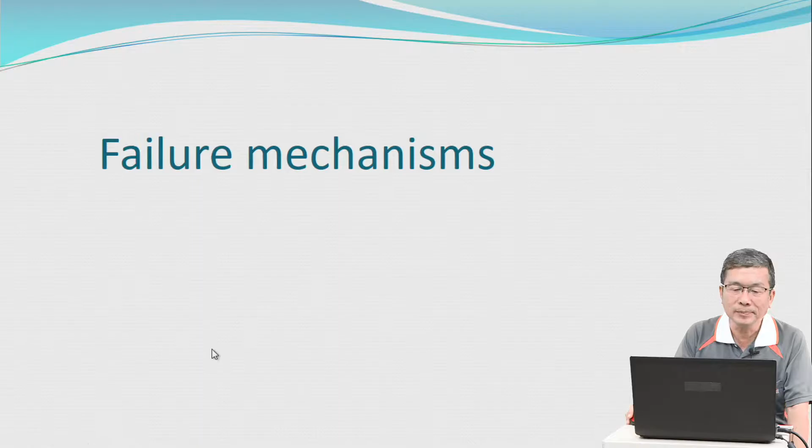Failure mechanism, the key words: failure mechanism takes into account the tensile, compressive, and shear stresses. Perform the calculations and tests. Ensure reliability. Rely on analysis, experiments, experience, and a design code. A simple model to prevent the material in a piece of hardware from being loaded to or above its yield stress.

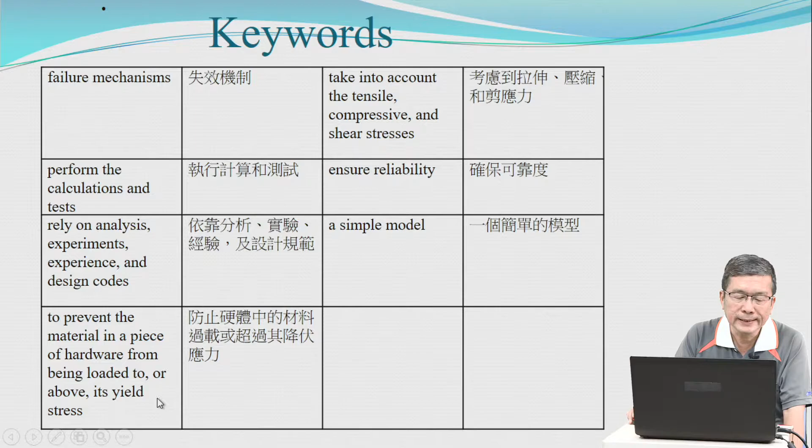Mechanical engineers determine the shape and the dimension and select materials for a wide range of products and types of hardware. The analysis that supports those design decisions takes into account the tensile, compressive, and shear stresses that are present, the material properties, and other factors that you will encounter later in your study of mechanical engineering.

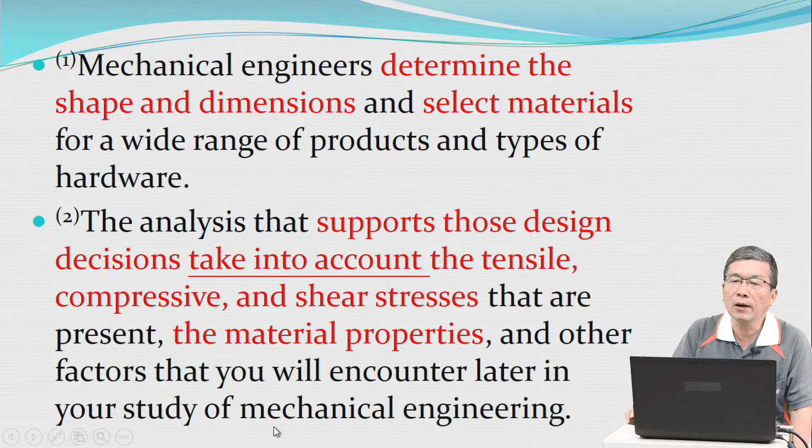Designers are aware that a mechanical component can break or otherwise be rendered useless by a variety of causes. For instance, it could yield and be permanently deformed, fracture suddenly into many pieces because the material is brittle, or become damaged through corrosion.

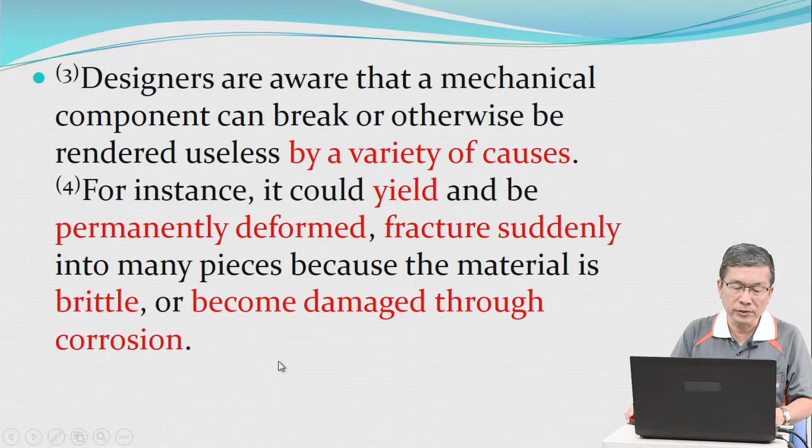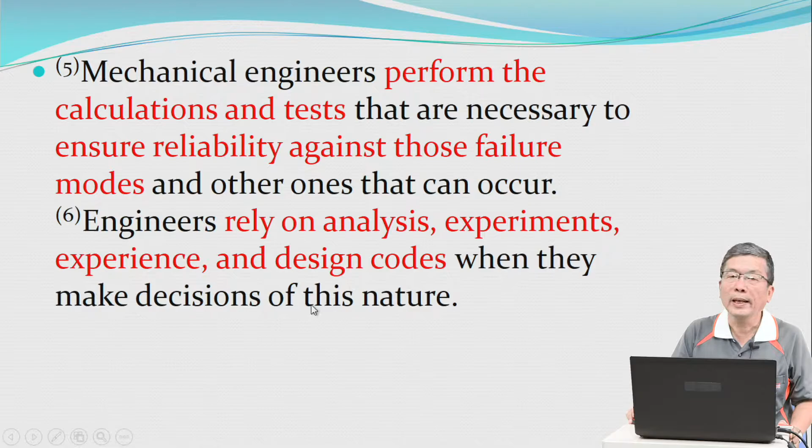Mechanical engineers perform the calculations and the tests that are necessary to ensure reliability against those failure modes and other ones that can occur. Engineers rely on analysis, experiments, experience, and a design code when they make decisions of this nature.

In this section, we introduce a simple model that engineers use to determine whether a mechanical component is expected to yield because of either tension or shear stresses. This analysis predicts the onset of yielding in ductile materials, and it is a useful tool that enables mechanical engineers to prevent the material in a piece of hardware from being loaded to or above its yield stress.

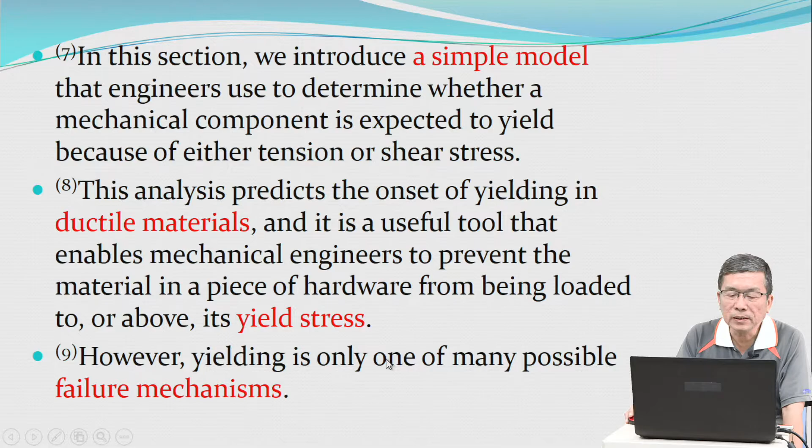However, yielding is only one of many possible failure mechanisms.

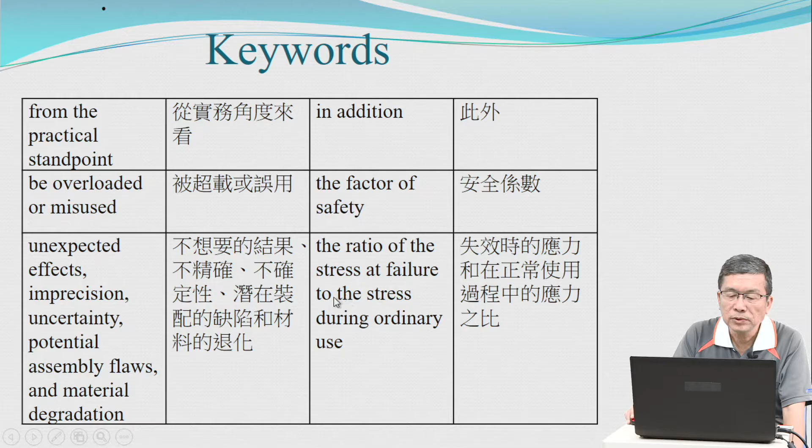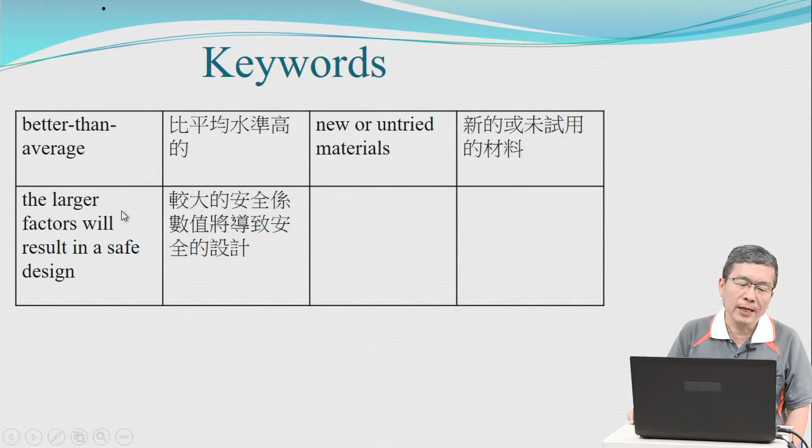Factor of safety, the key words: from the practical standpoint, in addition, be overloaded or misused, the factor of safety, unexpected effects, imprecision, uncertainty, potential assembly flaws, and material degradation. The ratio of stress at failure to the stress during ordinary use. Better than average. New or untried materials. The larger factor will result in a safe design.

From the practical standpoint, engineers recognize that despite their best intentions, nothing can be built to perfection. In addition, no matter how carefully one might try to estimate the forces that are going to act on a structure or machine, it is always possible that the mechanical component might accidentally be overloaded or misused.

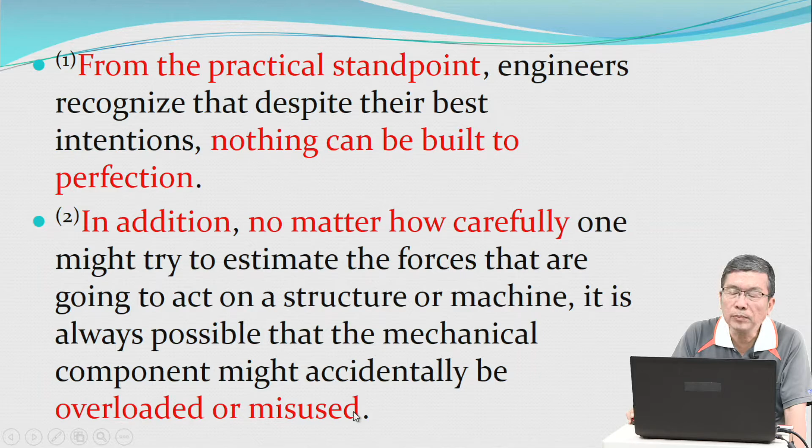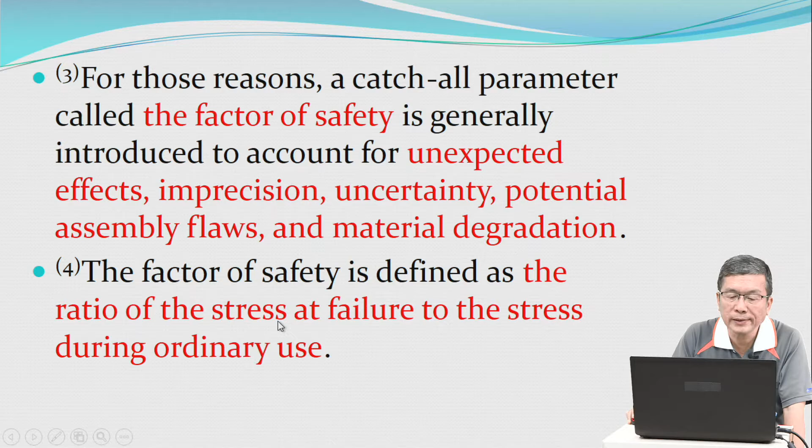For those reasons, a catch-all parameter called the factor of safety is generally introduced to account for unexpected effects, imprecision, uncertainty, potential assembly flaws, and material degradation. The factor of safety is defined as the ratio of the stress at failure to the stress during ordinary use.

The factor of safety to guard against ductile yielding is often chosen to fall in the range between 1.5 and 4.0, meaning that the design is intended to be between 150% and 400% as strong as it needs to be for ordinary use.

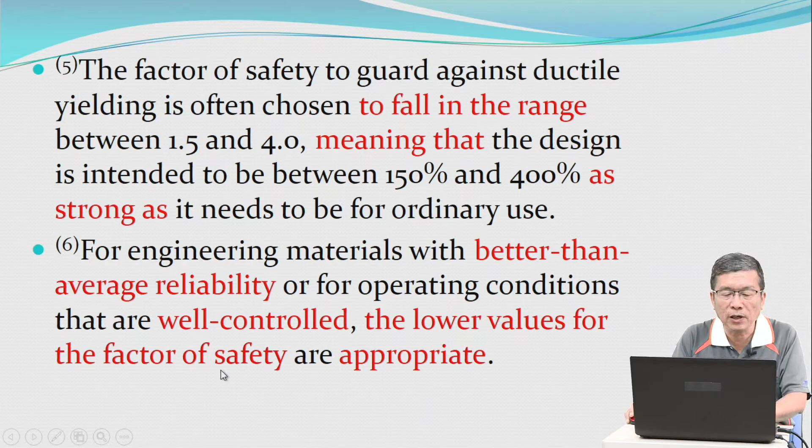For engineering materials with better than average reliability, or for operating conditions that are well controlled, the lower value for the factor of safety is appropriate. When new or untried materials will be used or other uncertainties are present, the larger factor will result in a safe design.

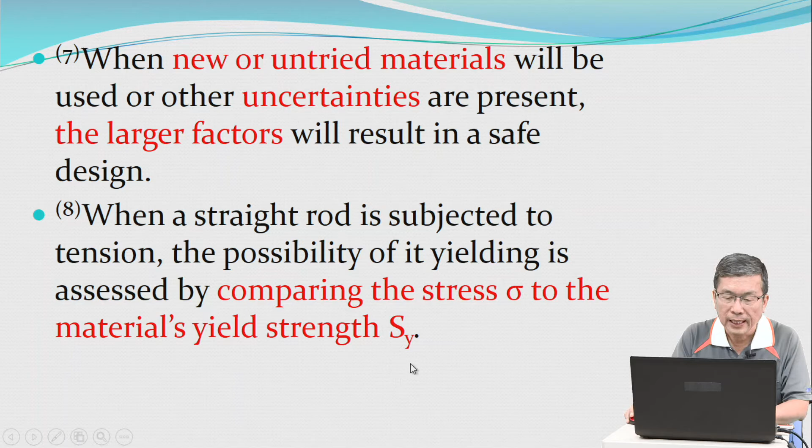When a straight rod is subject to tension, the possibility of it yielding is assessed by comparing the stress sigma to the material's yield strength S sub y. Failure due to ductile yielding is predicted if sigma is greater than S sub y.

Factor of safety: engineers define the tensile stress factor of safety as N tension equal to S sub y divided by sigma. If the factor of safety is greater than 1, this viewpoint predicts that the component will not yield. And if it is less than 1, failure is expected to occur.

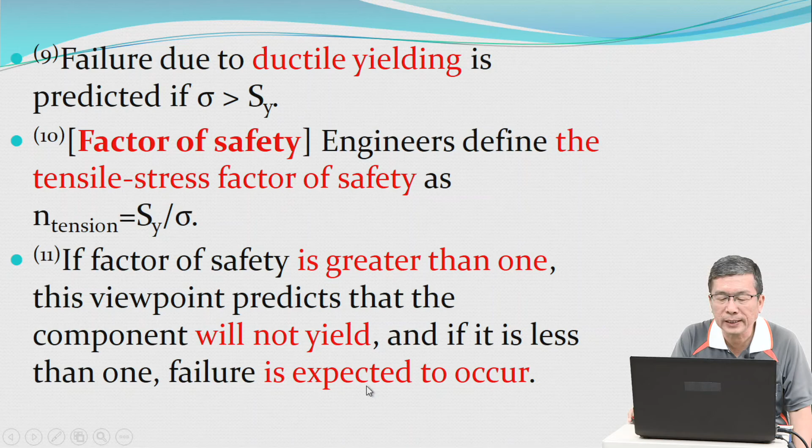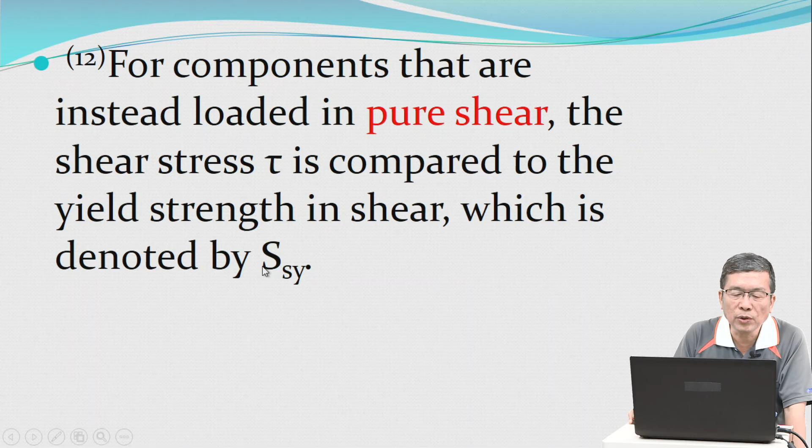For components that are instead loaded in pure shear, the shear stress tau is compared to the yield strength in shear, which is denoted by S sub Sy.